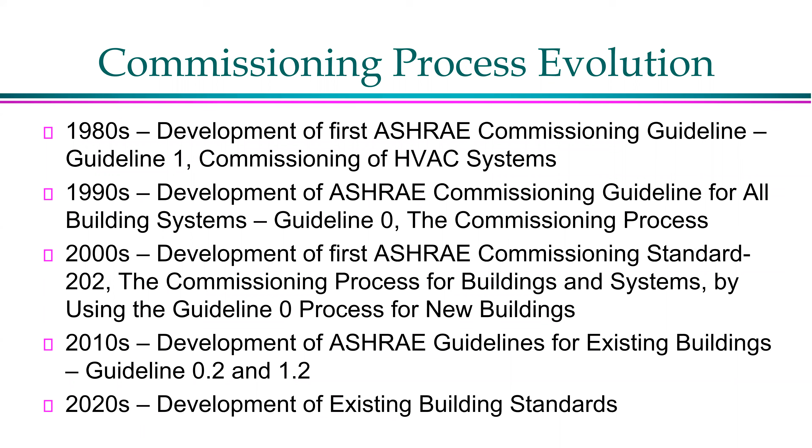And then in the 2010s, we started to work on existing buildings, because Standard 202 is about new buildings. If you're talking about existing buildings, that's 0.2 and 1.2. And now we're starting to develop a commissioning standard for existing buildings. It's going to be Standard ASHRAE 230.

So what is commissioning? What's the official definition based on ASHRAE? It's a quality-focused process, a quality control enhancement for a building to be sure that it's built properly. It focuses on verifying and documenting that all of the commissioned systems. So in this case, you're not commissioning an entire building, you're commissioning the building systems.

So you can pick, or the owner can pick, any number of different systems that he wants commissioned, and it can be applied to any one of those particular systems. The codes normally are centering on the energy systems and the water systems, because that's the thing that affects the efficiency the most, but there are other things that are starting to be included, as we'll talk about.

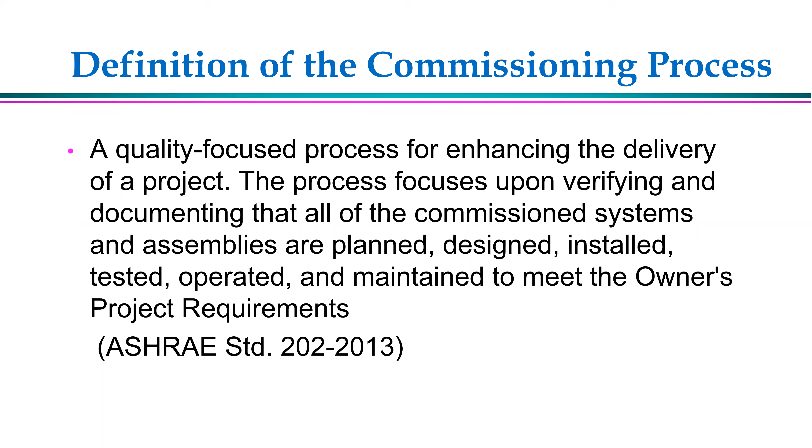But you need to be sure that the assemblies are planned, designed, installed, tested, operated, and maintained to meet the owner's project requirements. So that's a mouthful, that's a bunch of stuff that you want to do. So you're talking about using commissioning that starts at the design or pre-design stage and lasts all the way through the building operation.

So if you break the commissioning process down into requirements, you have to figure out what do you want the building to do, what do you want it to be, who is it for, what are you going to be doing in the building. Be sure that the design meets those requirements and that the construction also meets the design requirements and the owner's requirements, in this case, performance requirements.

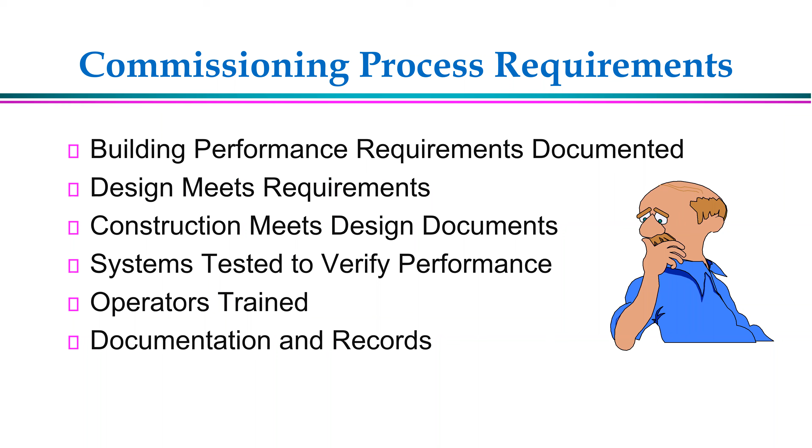And then you need to be sure that the things are tested and documented, and to be sure that the operators are trained, because in the past we've seen projects where they built a wonderful building, but all they did for the operators is hand them the keys, and they didn't have a clue how to operate the building, and that doesn't produce good results. Then all of the items above need documentation, need records, and that's part of the commissioning process.

So let's talk real briefly, based on ASHRAE Standard 202, the 2019 updated version. These are the steps, and I'm going to step through these pretty quick. The process starts at pre-design. Theoretically, the first person that the owner should hire or contract when talking about a new project is a commissioning provider.

The commissioning provider helps them do all of the other kinds of documentation, including determining requirements for the building. It's called OPR, or Owner's Project Requirements. Also, at about the same time, you develop a commissioning plan. What this does is it says, okay, this is what I want the building to do, this is what I want tested, and to what level do I want it to perform. So you're defining at the early stage.

Now, the commissioning plan early on will help you develop a lot of the other documents, including the specifications and a bunch of other things.

Then you provide this information to the design team, architect, engineers, and planners, and they design things. There's a document called a basis of design. That's the owner... that's the architect and engineer's document that responds to the owner's project requirements. And that is what the owner approves, how he wants the building built and designed.

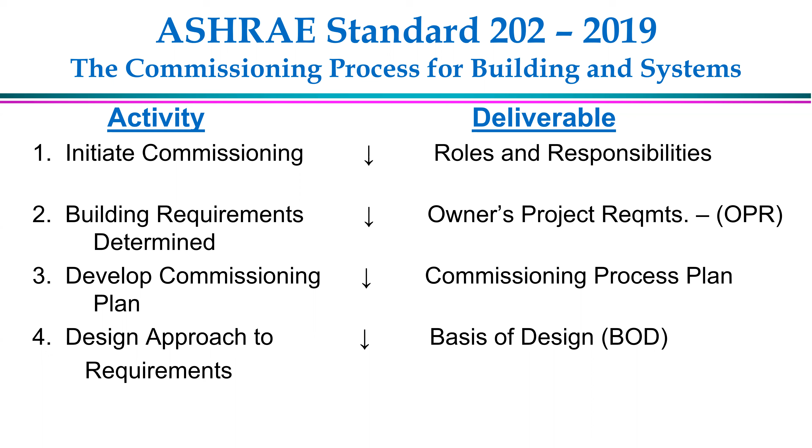And then, as part of the process of design, you set the contractor requirements. In this case, you add specifications. Since commissioning is a team sport, there's a lot of people involved, so you can't do commissioning properly with only one person or one agency doing the commissioning. Everybody has to participate, including the contractors, the designers, and the building officials, as they need to.

Part of the process then is, after the design is finished, the commissioning provider will review the design. A couple of things he's doing here now would be to figure out exactly what the details of the design are, and if he sees anything that might be a problem later. What we find over the years is about 20 to 30% of the problems that you have in a building during commissioning are design problems, and if they're resolved early at the design stage, it's cheaper for everybody.

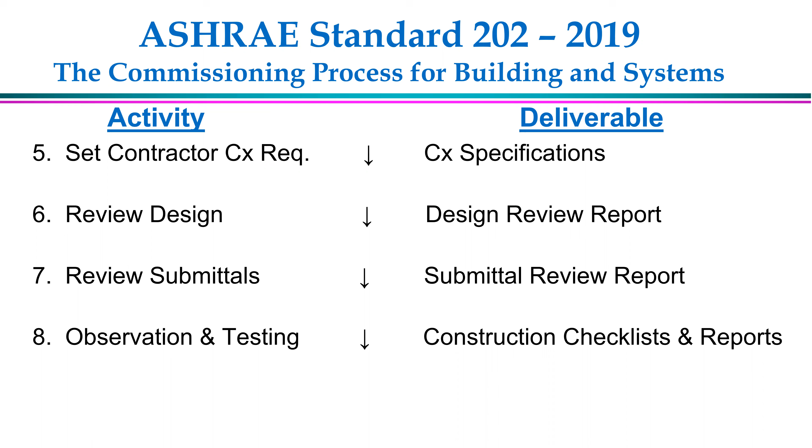Then during construction, the commissioning provider reviews the submittals, just like the engineer and architects do, but this doesn't replace architect and engineer review. Basically, what the commissioning provider is doing is saying, okay, I'm reviewing it to be sure it meets the owner's requirements. Then during construction, you observe the construction on site, do the testing, and you end up with filled in checklists and reports. Those are now required by code, that you have testing reports before a building's completed.

Part of the process includes issues and resolution logs, which is a communication device that tells you what a question might be. This helps the contractor and the owner resolve issues, because it's a communication tool for how to solve problems.

Then there's a new process called systems manual. It used to be called O&M manuals. Now, systems manuals bring together a whole bunch of things. We won't go into a lot of detail, but systems manuals are very useful for building operation and can be a requirement, and it is in some of the codes.

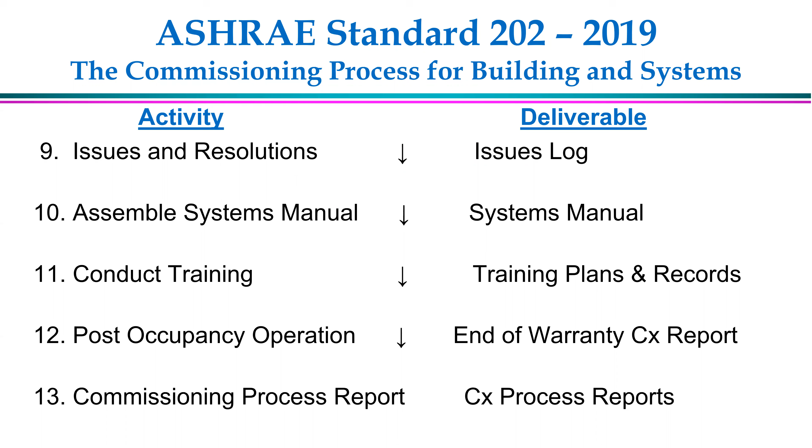Then to be sure that training is conducted, so that the building operator has a fighting chance of knowing how the building operates. And then you check post-occupancy operation, and you generate some reports. Some of those reports might be preliminary, that, as we'll talk about, you might need for the commissioning of the project so you can get a certificate of occupancy. And then later, at final completion, when all of the testing is done, you do a final report.

Now, commissioning, we change gears here a little bit. Commissioning has various variations and titles. Standard commissioning is basically you're doing it to the ASHRAE Standard 202, and it's the standard process that we just talked about.

Some people have decided to use what they call paper commissioning. In this case, what they're doing is the commissioning provider provides checklists to the contractor. The contractor turns those in, and the commissioning provider never visits the job site—he trusts everything that the contractor gave him. So that's an issue that we're talking about in the industry right now.

Standard commissioning, going back to that, you can have sampling in it to be sure that things generally work. Technical commissioning is the next step—they test everything and go into more detail. Total building commissioning involves all of the building systems and the building enclosures. And then you can get into existing building commissioning, called retro commissioning or building tune-up, recommissioning. We'll talk about that a little later, but there are cities that now are requiring larger buildings to do retro commissioning on buildings that don't perform the way they want them to.

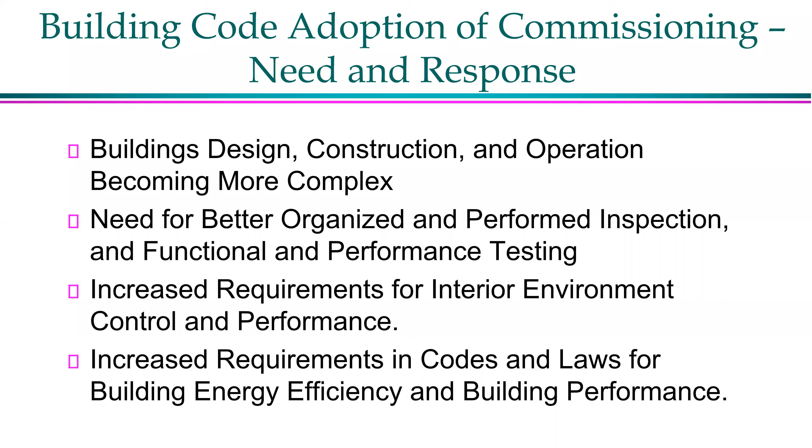We're going to talk about the increased codes and laws. So let's talk about codes here for a minute. The building codes, the ICC building codes, you've got a basic building code, which is basically a life safety code. And then after that was developed, the mechanical, plumbing, and electrical codes came in that support the building code and the systems in the buildings.

Then some years later, we started out with an energy code. That's when, back in the 70s and 80s, when that was starting to be developed, energy got to be a big problem.

And then after that, the sustainability process, starting in the early 90s, late 80s and early 90s, the sustainability issue, and they start calling it green. So the green code, which we're not going to talk too much about today, is an overlay code to the energy code and the mechanical and plumbing. That's why these things are sort of slanted here - each level is supported by the lower codes.

So let's look at some specific codes, and I'm going to go through a bunch of them here pretty quick.

Commissioning in the building code - I'm looking now at the 2018 building code. The 2021 building code is in printing now, and as I understand it, it'll be shipped sometime at the end of October, as well as the new energy code. The mechanical and plumbing code for 21 has already been published.

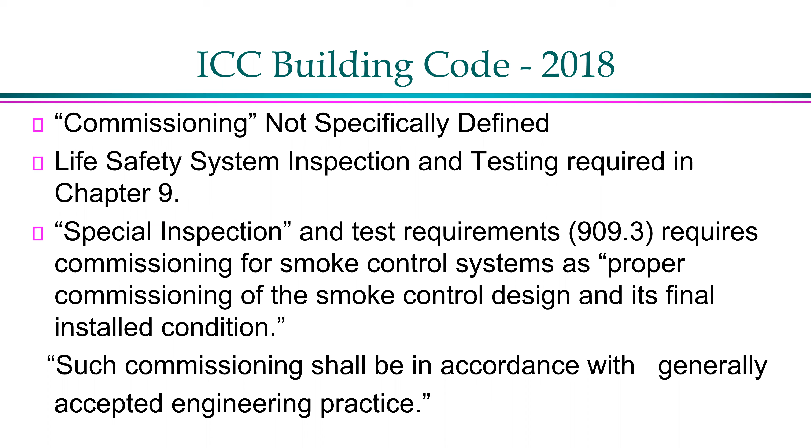In the building code, life safety systems inspection and testing is required in Chapter 9. It doesn't say anything about commissioning per se, but it does talk about special inspection testing requirements in 909, requiring commissioning of smoke control systems. It says: proper commissioning of the smoke control design in its final installed condition. That's about all it says about the word commissioning in the building code, but it does say if it's commissioned, it has to be in accordance with general accepted engineering practice. Most of the industry now says that ASHRAE Standard 202 is that process.

A few other things in detail - special inspector qualifications in Chapter 17. From a special inspection standpoint, some people consider commissioning providers special inspectors. They're really not from a judicial or AHJ standpoint, but they use the same kinds of backgrounds. For a special inspector - here we're talking about inspectors for concrete, steel, structural and the rest - you have to be independent from the contractor, have the right equipment, and have experienced personnel. That's a special inspector. The qualifications for the commissioning provider are basically the same.

And section 1705.12.6 requires periodic inspection of plumbing, mechanical, and electrical components for a list of specific items. So it gives you a bunch of things in 1705 to look at. That's the special inspection, which relates quite a bit to the commissioning process.

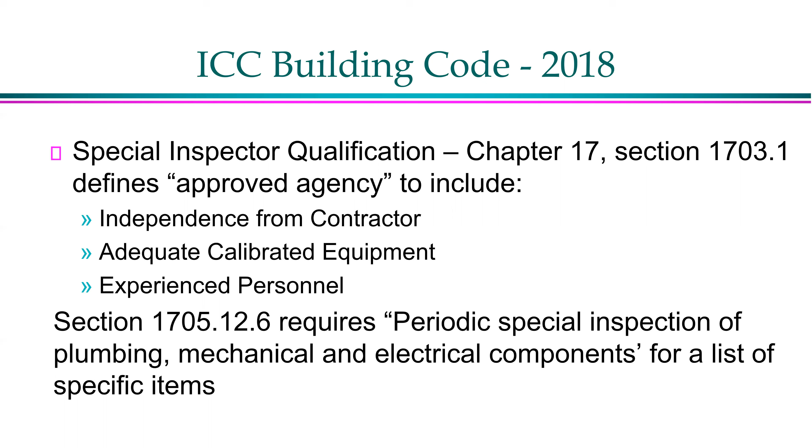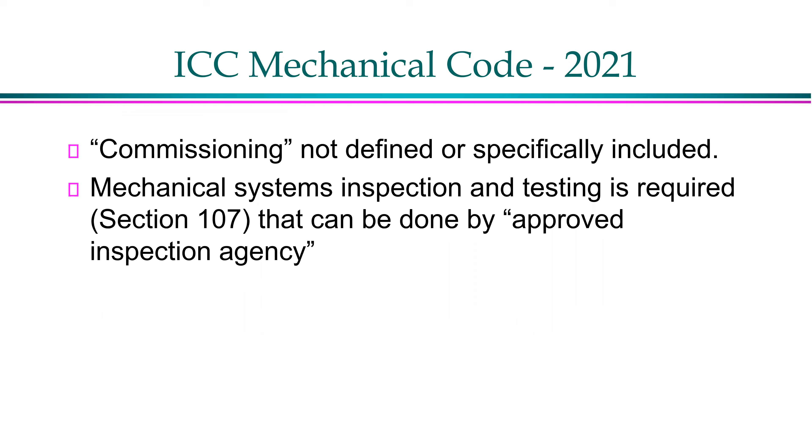Let's go to the Mechanical Code. Like I said, the Mechanical Code has just been released. The 18 version of the Mechanical Code for these items is virtually the same, so the 18 and 21 code are the same here. Commissioning is not defined in the Mechanical Code. Inspection and testing is required, but can be done by an approved inspection agency, so it gets back to your special inspector again.

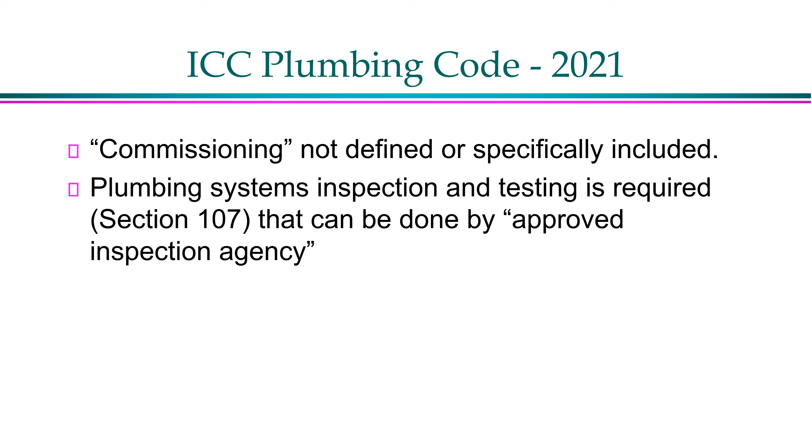The Plumbing Code, again 2021, is identical to the 2018 requirements and has the same requirements. Commissioning is not defined or specifically included, but again it talks about approved inspection agencies to inspect the plumbing installation like the mechanical installation. So let's get into the Energy Code.

The building commissioning definition is a little bit different. The commissioning definition on the Energy Code is a little different than some of the other codes, and it's different than the ASHRAE definition we talked about a few minutes ago.

In this case, it's a process that verifies, defines, and documents that the selected building and site systems, specific systems designated by the code and maybe more designated by the owner, have been designed, installed, and function. So it's pretty much the same thing we talked about. It talks about accordance with owner's project requirements and construction documents, but it adds minimum code requirements.

The question becomes, does that make the commissioning provider a code official, inspecting code? There's a big debate about that in the industry right now. We don't think it does, because commissioning providers are not trained or licensed to be building officials. So that might be an issue, but it is part of the official definition in the Energy Code.

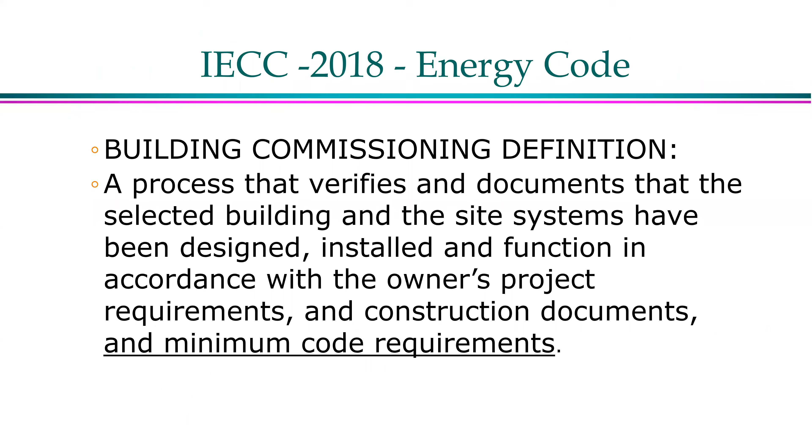The Energy Code requires, and we've got the sections up here, C408.1 and .2, that you develop a commissioning plan. As we look through the Energy Code, then the Green Code, and then some of the ASHRAE standards, the commissioning requirements are moving from the standards into the codes, with more detail in each code.

The commissioning plan is provided by the design professional or approved agency, in this case private companies or parts of engineering firms that do commissioning. But the commissioning plan is basically pretty much the same in all of the requirements and all of the documents.

Describe what you're commissioning, list the equipment. What are you commissioning specifically, and then what are the performance requirements? What are you testing to? That's got to be decided early on, so that everybody, including the contractor and the building officials, knows what needs to be tested and to what criteria.

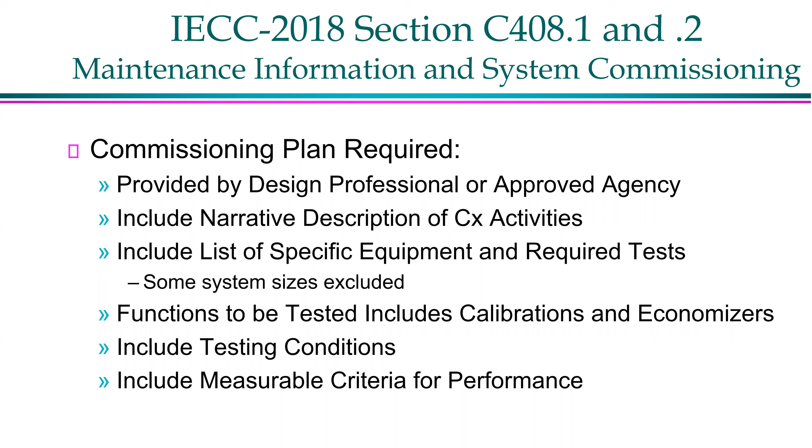And then all the functions and the rest of that stuff need to be defined with measurable criteria, so that building officials, architects, and contractors all know what the performance level of the building is supposed to be. It's all got to be on the drawings and in the commissioning plan.

Then as part of the function during the entire operation of the building construction, you need to provide owner documents. In some cases, particularly in the residential area, you have equipment labels that have to be attached, and residential testing requires certain labels to be put in the house, in the case of mechanical systems, mechanical and service water heating.

Then before final inspection, and this is how it works in some of the cities, we have to provide the inspections and the completion, or as far as we can go, before the final inspection is done. This is done by the design professional or approved agency for mechanical equipment, and the documents have to include all of this so everybody knows what's going on. This is a requirement in the Energy Code.

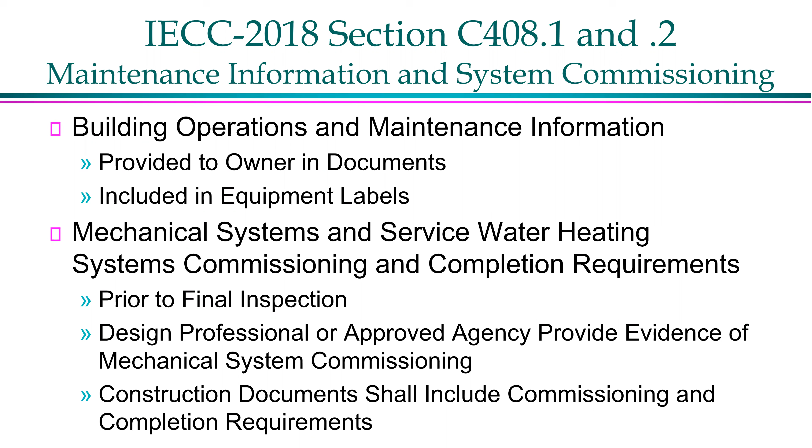One of the interesting things is also the advancement of testing and balancing. Systems testing and balancing used to be, in the code, that you were required to have balancing dampers and balancing valves, but in the 2009 codes, and to some extent the 2015 codes, it required you to have the capability to test and balance, but didn't require you to do anything. Now testing and balancing and a report is required in the Energy Code.

The testing and balancing has got to be finished. The commissioning provider needs to look at the testing and balancing and be sure that it's done properly. In this case, air systems and water systems, if you have water systems, all of that has to be finally tested and balanced, and the documentation and the test and balance report has to be reviewed.

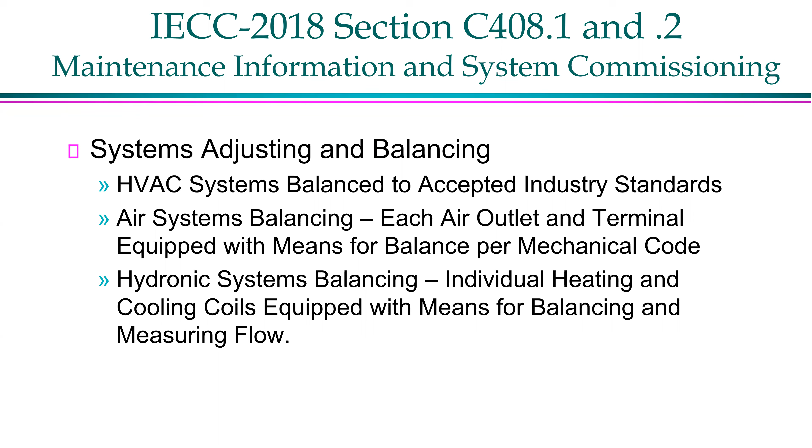Then after the testing and balancing, functional performance testing. There are various different levels here where they talk about functional performance testing. Actually, functional and performance are two different levels of testing. There are three levels of testing: inspection, level 1, is it there? Function, level 2, does it go on? Performance, level 3, does it do what it's supposed to do?

Think of that as a light fixture. Is it there? Does it go on? Does it put the right amount of light on the table?

So what you're doing there is demonstrating the installation and operation per the approved plans, telling the owner and the building official, this thing works right, or it doesn't, and here's a list of things that do or don't. It also requires that control systems be tested, and there are a lot more control systems than there used to be. Then it specifically zeroes in on economizers, which are a requirement in certain areas of the country, and it requires certain economizers, or virtually all economizers, to be tested and reported.

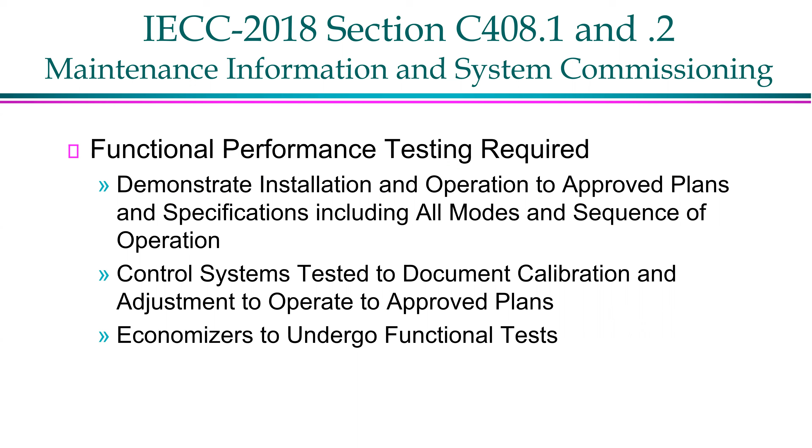Before you end up with a final inspection, not all of commissioning can be done before the building is CO'd. Part of the issue is the climate: is it too cold to do air conditioning testing, too hot to do heating testing? And there are other things being completed and installed in the building. So you've got a preliminary testing report provided by the commissioning provider that lists all the things that worked and all the things that didn't work, and the status of the testing and commissioning at that point, including the results.

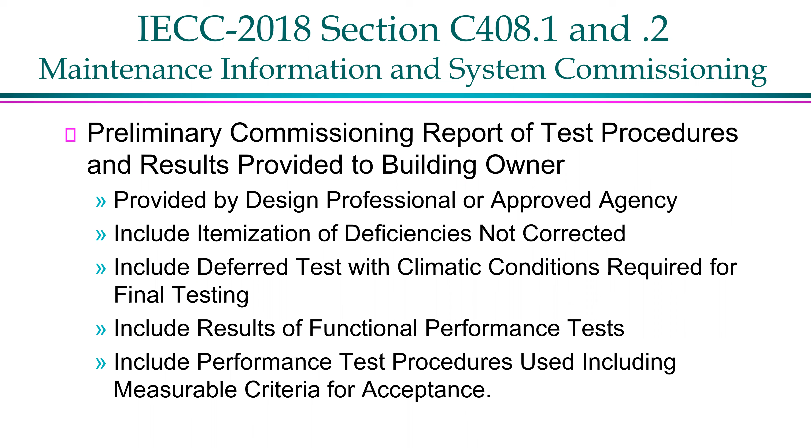The requirement is that this be provided to the owner. It can also be a requirement that the building official gets a copy of that before CO time. So there's a whole bunch of different options, and it's up to the building officials to decide exactly how much information they want to see and have on the building.

Functional testing of lighting is a little bit different than the air conditioning and hot water. In the IECC, it says that the functional testing can only be certified as done properly by the registered design professional. Approved agency is not included in the definition here.

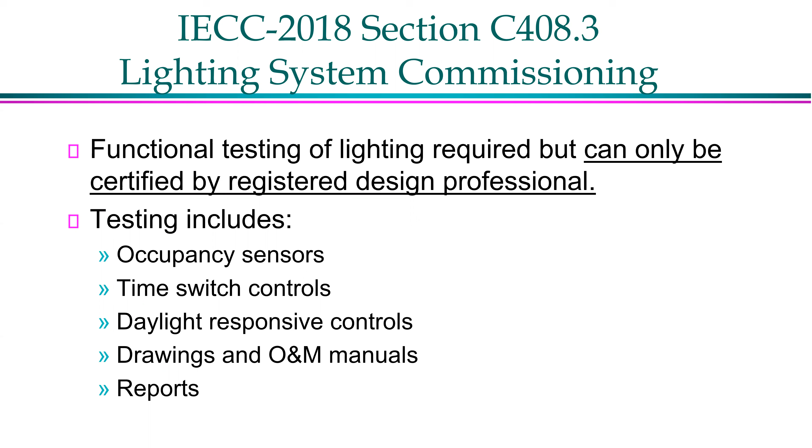Most of the time it's done by the commissioning provider. But since lighting controls are now detailed in great quantity in the Energy Code, what you're checking is all of the things listed there: occupancy, time, daylights, drawings, all the rest of that is part of the testing. The testing and commissioning of lighting control systems is probably our biggest challenge in the field nowadays, but it's very difficult to get all of the lighting stuff working properly.

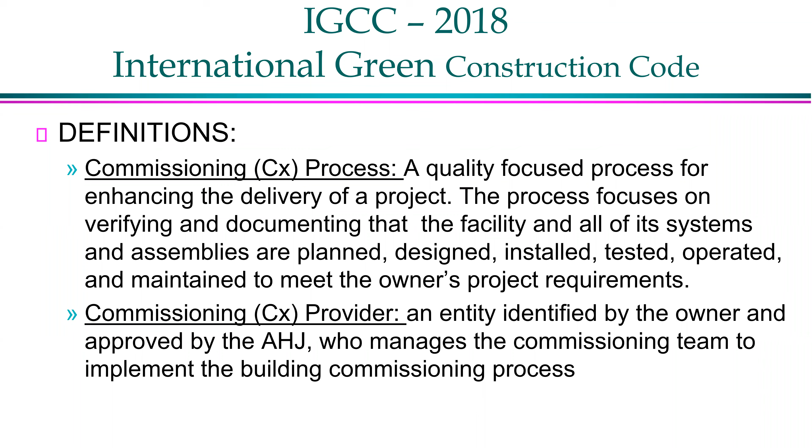Let's look at the green construction code. The commissioning process definition is a little bit different, but basically the same, though it doesn't say anything about monitoring code requirements. It does have a definition of the commissioning provider, identified by the owner and approved by the AHJ, who manages the commissioning team to do the commissioning. As we'll see in a minute, that person is being designated as part of the code requirements.

Commissioning and performance is required. This is in 2018, Chapter 10. It's required to meet generally accepted engineering standards, and then you have specific equipment. Here are the things you've got to do as a minimum for the green code: air conditioning, lighting, water heating, water pumping, and irrigation systems. That's the list of stuff that needs to be commissioned based on the green code.

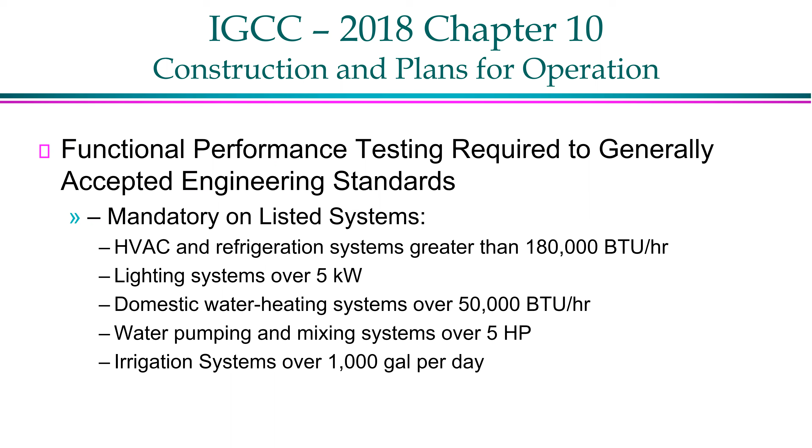And those requirements are moving towards the energy code, and we'll see what happens. When we talk about 90.1 in a minute, we'll see what happens to the energy code based on these changes. The FPT is put in the construction documents so the contractor and everybody knows what's going on. And then prior to building permit, as we just mentioned...

Somebody needs to designate, in this case the owner needs to designate, the FPT provider. It may be an owner's employee, an independent commissioning provider, or designers familiar with FPT, independent of the system design and construction. Here again, we're looking for independence, somebody looking over the shoulder of both the designers and the contractors.

So part of the process before permit is that the designated person or agency needs to review the construction documents to be sure all of the information the contractor needs is there: sensor location, control sequences, performance criteria, all of that needs to be in the documents. Whether you're building something with 2 rooftop units or something even larger, all of the criteria needs to be there.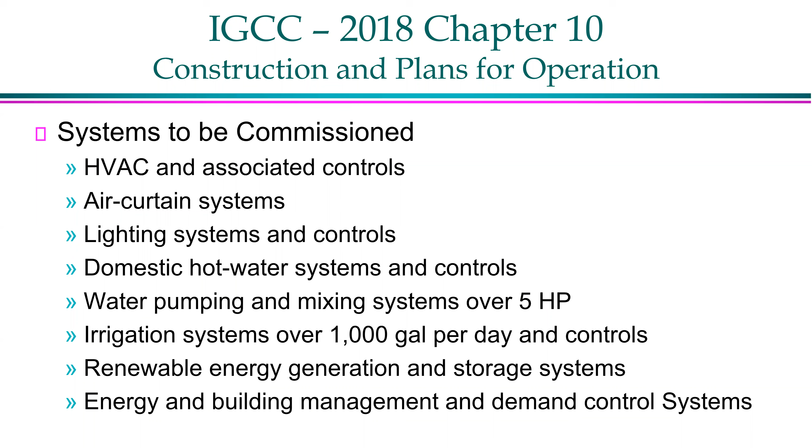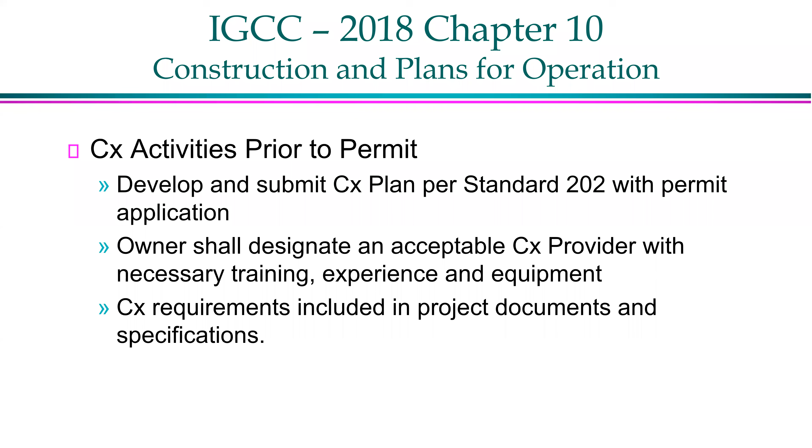In this case, construction plans for operations. This is commissioning activities prior to permit, again for the larger systems: develop and submit a CX plan per Standard 202, get a CX provider designated, and the documents and specifications have to recognize commissioning. That's something the plan reviewer should check to be sure all of that stuff is included. If you're doing a plan review, be sure all the testing and commissioning requirements are in those plans and specs.

A few more things before building occupancy, again for larger buildings: verify everything's done and completed, and that the owner is provided with a preliminary commissioning report. The whole idea is to be sure commissioning is done and the owner has this report. There are a couple of ways for the building official to verify that. He can require a letter or form filled in, as some cities do, by the owner, or in some cases let the independent commissioning provider provide that document, so the building official knows commissioning has been done, somebody certifies it's done, and that the systems manual is there.

After building occupancy, there are a few things to be completed. Standard 202 lists those things, but all of the testing and all of the systems completed after CO need to be in the commissioning reports and the systems manual by the end of the project.

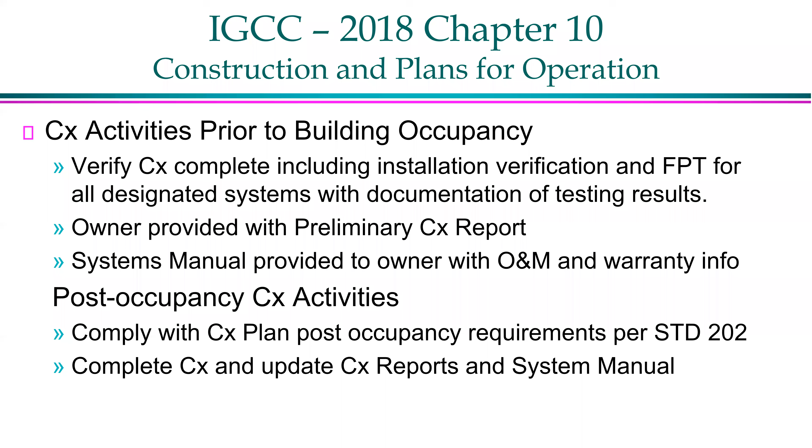Plans for operation are required in the Green Code, and this is probably going to end up in the Energy Code at some point too - that's just a guess on our part.

The preliminary commissioning report basically says pretty much the same thing we talked about a few minutes ago: what did you test, what kind of issues did you have, what deficiencies, what went wrong, what didn't you test that you're going to test later, what kind of training happened, and what kind of plan for completion do you have. Basically it's a plan for what you've got, how it works, and where you're going with it. That's really necessary to be sure something gets done later.

Final commissioning updates all of that, including the systems manuals, to the latest and greatest information. The systems manual includes a lot more items than the old O&M. The old operations and maintenance information used to just be catalogs from the various suppliers, and you might have a little operating data.

The systems manual starts at the beginning of the project and includes all the documentation - OPR, BOD, all the specifications for commissioning, all the plans, all the final documents for the plans and specs for the building, any changes. This is a total record of how the building was built. It has all the commissioning plans and testing plans, all the results, all the commissioning reports, a copy of all the documentation, submittals, and the rest, all in one spot on one flash drive or CD, so all the information is there and doesn't get lost in pieces. That's why the systems manual is really important, to be sure that's done and the building can be operated.

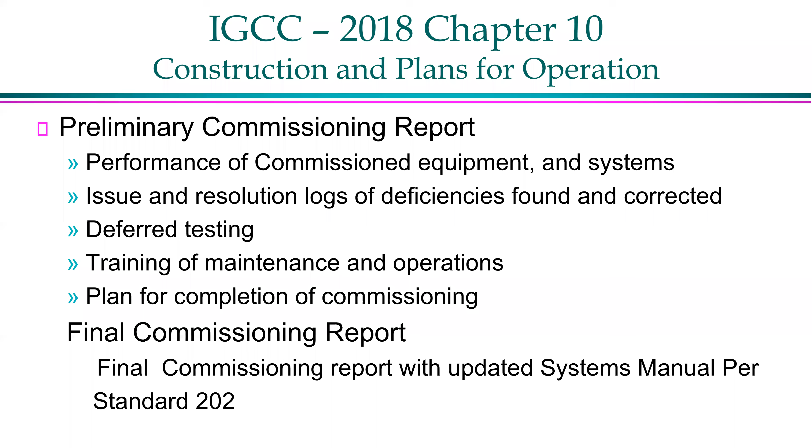IGCC has another appendix, Appendix I, which is advisory or informational, not mandatory - what they call informative. It includes information about commissioning and provider qualifications, which we talked about a little while ago - experience, independence, and in some cases registration or certification. You could require, as part of the ordinance, that commissioning providers be certified. There are about a half a dozen different certification organizations around the country, so certified commissioning providers are available.

The overview of the process in Table I 101.2 has all of the activities we've talked about before, and deliverables, and who provides them. This is more informational than anything else.

It also has a document description, going through all the documents listed here that we've talked about - a half page or a page on what's in the OPR, what's in the CX plan, what's in the specifications. This is informational but gives you an idea of what should be there. If you're doing a plan review or specification review, this is the kind of information that should be in those plans and specifications, and you could use this as a review document to be sure all of that information is there.

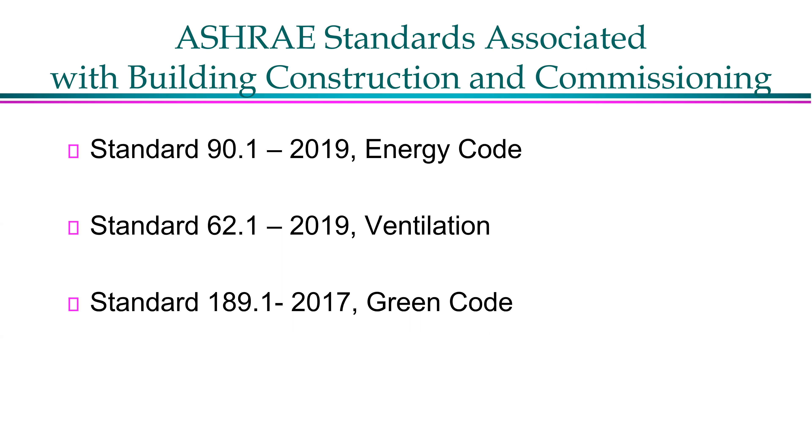The ASHRAE standard 90.1, this new one is the 2019 version, and I'm waiting for the 2021 issue of the energy code, because the energy code normally picks up most of the information and items in 90.1. So a lot of changes are happening. There's over 100 changes in ASHRAE 90.1 between the 16 version and the 19 version.

And a lot of those important ones, not number-wise but importance-wise, were commissioning. It specifies verification and performance testing on building systems, controls, and building envelope. Building envelope is very important to the energy efficiency of a building.

So we're starting to see the requirement for building envelope commissioning, similar but a slightly different process for building envelope. There are different, separate standards for building envelopes. We'll talk about that in a minute.

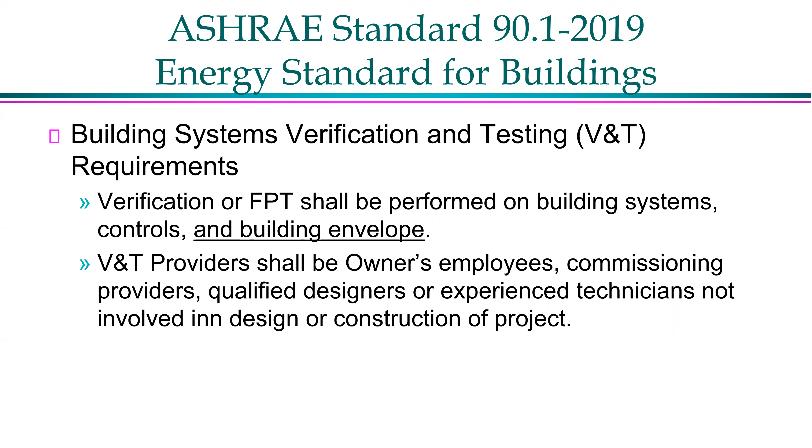Now you've got verification and testing providers, which can be pretty much the same thing we talked about before in the green code. Commissioning providers, qualified designers, not involved in the design or construction of the project. So again, this is new information for 90.1.

Information for the permit application, again, pretty much the same thing that the green code requires. Now, one of the interesting things is if you look at the green code and the ASHRAE 189 code or standard, that's where most of this information in 90.1 came from.

The group that wrote these into the 90.1 code used the green code and the 189 document as the basis for a lot of these requirements. So a lot of these things are the same. We'll see what ends up in the 21 IECC.

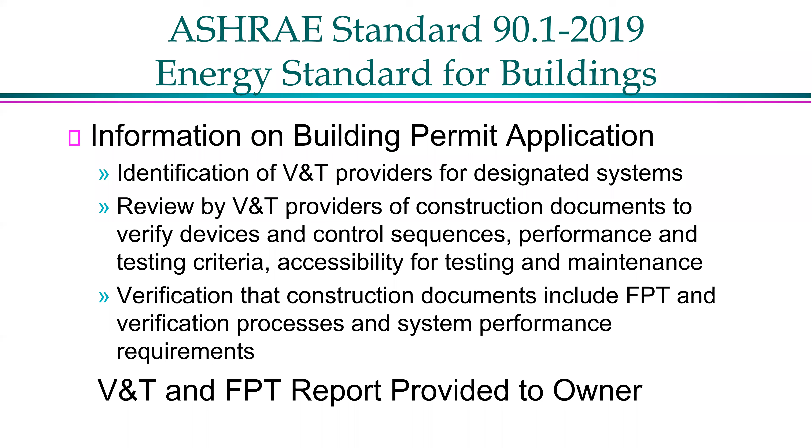But again, identification - these are the same things we talked about before. Identify the provider, be sure you have all the information in the construction documents, and all the performance data and other things needed for commissioning is in the documents. All of this must be provided to the owner - it's part of the code, part of the standard.

The building commissioning requirements again recognize ASHRAE standard 202. So there's a good possibility that the ASHRAE standard 202 process will be included in the new IECC, but we would have to see. Commissioning document compliance, again with building systems and now added building envelope, must be in the commissioning document - same process as before.

Commissioning providers: training, experience, equipment, and third party not associated with the project. So pretty much this is standard - all of these requirements are special inspector requirements. They're all commissioning and FPT provider requirements.

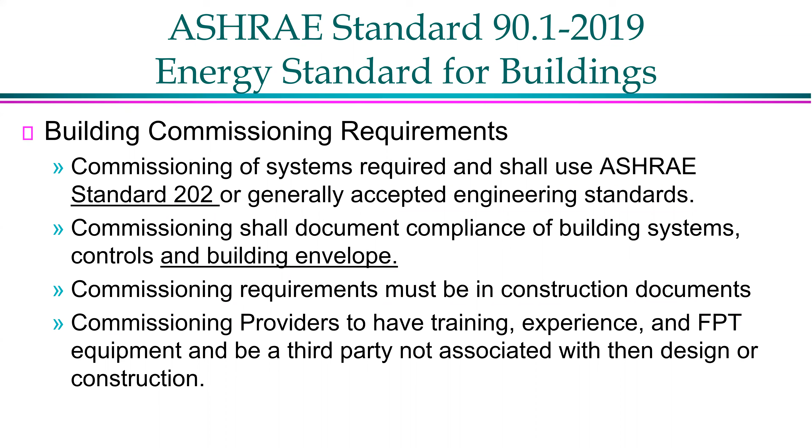Again, this moves some of the things we just talked about in the green code into the energy standard. Prior to permit: commissioning plan to the owner, designated commissioning provider, design review by the provider submitted to the owner, construction documents include commissioning requirements. All of these are pretty much getting standardized - things that need to happen before permit.

You've got to have somebody there in charge of it. All the requirements need to be in the plans and specs so everybody can put it in their estimate and everybody can do it in the project. So pretty much standard in most of the things that are happening now.

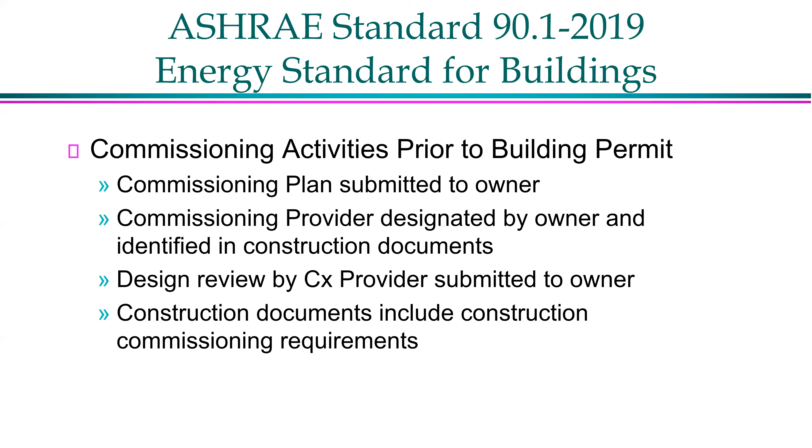Project commissioning documents: commissioning plan, design review report - all of that happens before permit. And then a preliminary commissioning report at the end, similar to what we talked about before.

What did you test? Does it comply to the building systems, design, and owner's requirements? What did you find wrong? Did the training get done to the extent it could? What are you doing to finish everything from a commissioning and training standpoint?

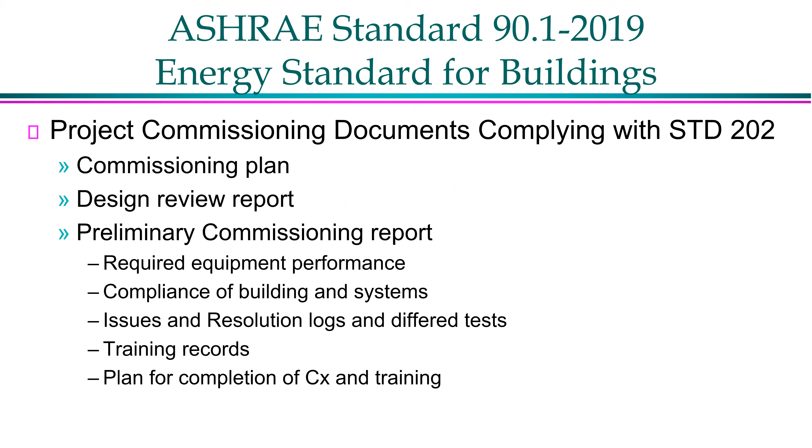Before occupancy, there's verification that it's all completed. The owner is provided with verification and FPT documentation, and owners provide that to the building official.

Here's what we talked about before. There are a couple of different ways for the building official to learn whether commissioning is done. In this case, a letter of transmittal acknowledging receipt of the verification, FPT documentation, and preliminary commissioning report, or the building official can ask for a copy of the commissioning reports, so you can have all that documentation if you want the detail.

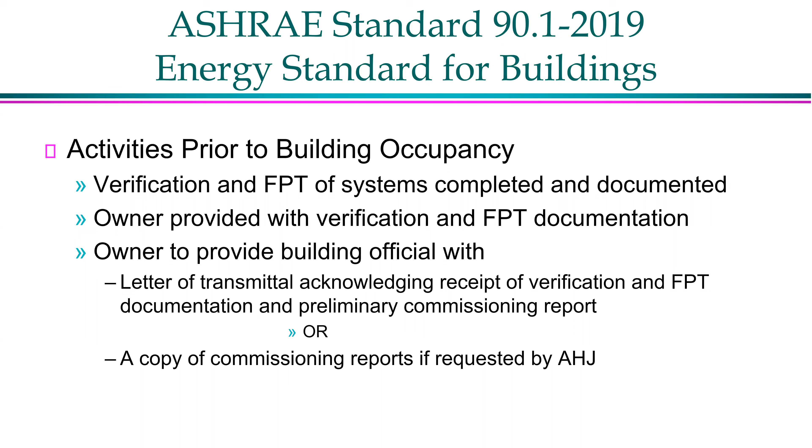There's a lot of good information in there on the drawings. That's certainly something a system that the city or county doing the building inspection would want to do on their own buildings. These are things that would make the operation of the municipal and state buildings a lot better.

Again, there's an Appendix H, which is very similar to Appendix I in the Green Code. Again, benefits of commissioning, qualifications of the providers—that's pretty much what we've talked about. Then the overview of the process, all of these things, and this is just a list. There are multiple pages of these things, including the commissioning documents and the various contents of the documents.

So again, same thing we talked about before, but this has now evolved from the 189 code into the 90.1 code, and may well end up in the energy code itself.

Looking at a couple of the other standards, ASHRAE Standard 62, ventilation for acceptable IAQ, which is getting more and more important. Standard 62.1 does not define or include commissioning per se—it's not in the 19 version. But it does specify construction and startup, including protection of materials, duct system construction standards, all of these things, and it requires testing and balancing and outdoor air setting. All of that's required in 62.

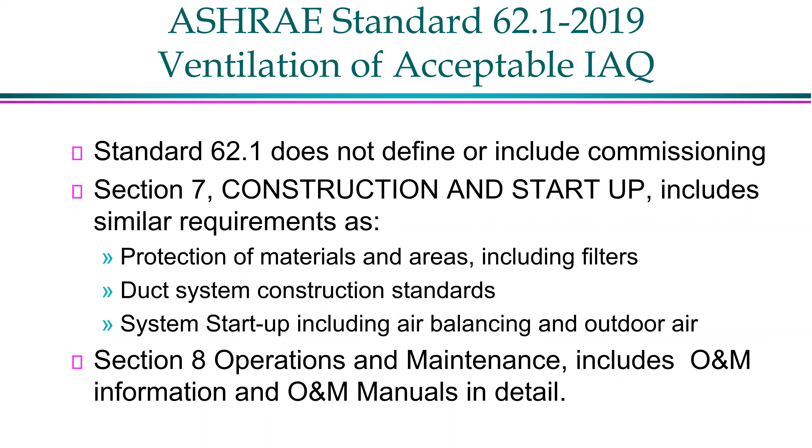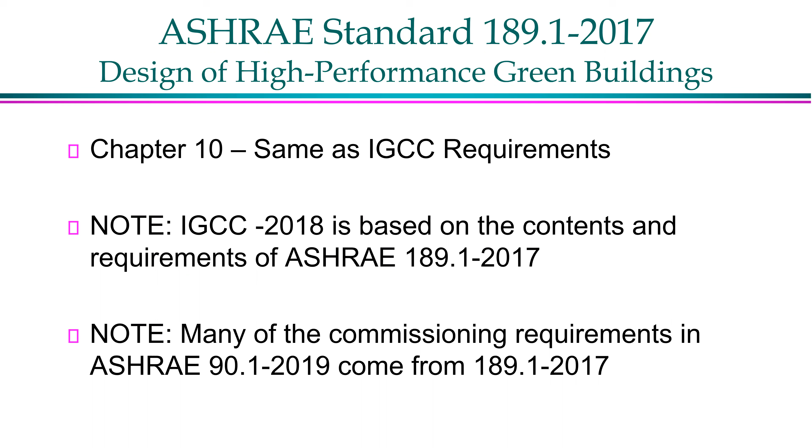And then it has Section 8, operations and maintenance, which includes a lot of the things that the systems manual includes. 189.1 2017, I'm not going to go over because it's virtually identical—the 18 Green Code is the same thing as ASHRAE 189.1. And as I mentioned, the Green Code is based on 189. These requirements basically also ended up in the 90.1s that we just talked about.

A couple of other things we might want to look at here: the Illuminating Engineering Society has a commissioning guideline, DG-29-11, that's been around for a while. It applies to lighting and control systems, and it references and utilizes the same phases and information as ASHRAE Guideline 0. So it's basically the same process, but it's specifically about lighting.

From the fire and safety codes, NFPA codes—the 72 code, chapter 14, talks about inspection, testing, and verification. Only in one section shown does it mention systems commissioning testing, but it doesn't give much of a definition; it assumes you know what that process is. 90A, HVAC systems, only talks about acceptance testing. In 92, smoke control requires a report of initial commissioning, and speaks about commissioning included in the O&M manuals. Then NFPA 99, healthcare facility, does require HVAC commissioning in healthcare projects.

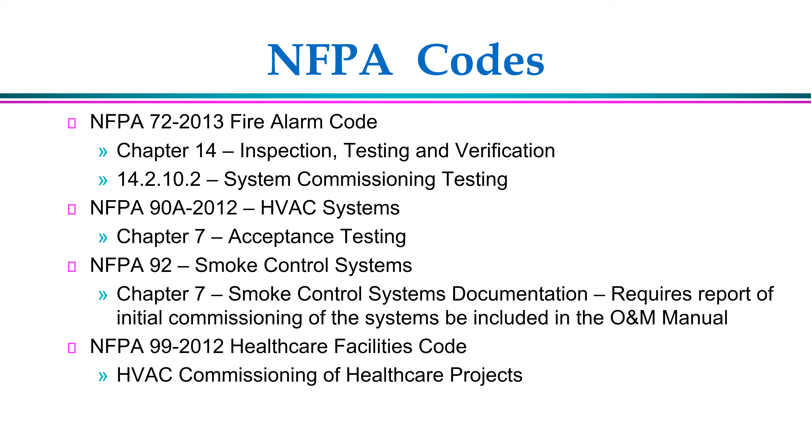NFPA also has guideline 3 and 4, which speaks to the commissioning of various different systems.

So that NIBS document has moved into ASTM, and ASTM has picked up those various guidelines and standards on envelope commissioning, enclosure commissioning. There's a bunch of other programs that require and work with commissioning that you might run into in the application, design, and construction of buildings.

Of course, LEED—pretty much everybody knows, Leadership in Energy and Environmental Design—is still an active program, with a lot of buildings still being built that way. LEED is strong on energy, but it also involves a lot of other good building procedures and aspects other than energy, including water, building materials, site considerations, and the rest, which are very important for good building operation.

Green Globes is another parallel system very similar to LEED, though documentation is a little less. LEED has specific requirements you've got to do; Green Globes doesn't have specific requirements, but it has pretty much the same items to consider.